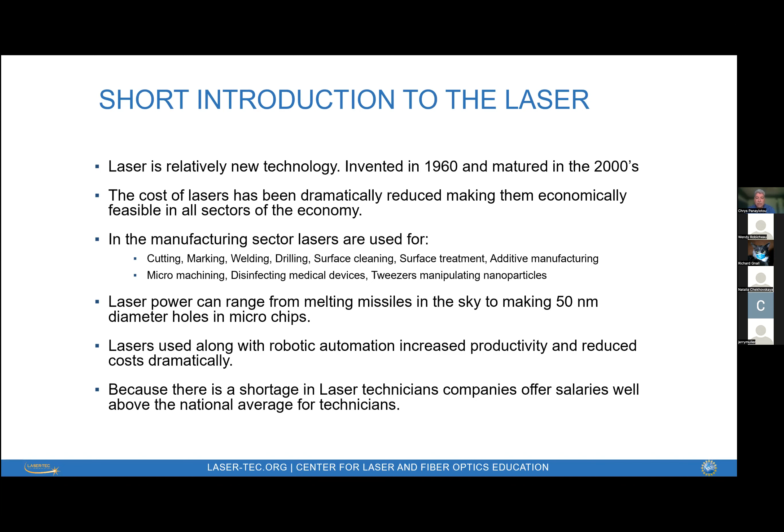So let's do a short introduction to lasers and why lasers are able to do what they do. What's really different in lasers than any older type of technology? Well, laser light is unique. It is man-made and has two key characteristics which make it different than all other types of man-made or natural light.

The first one is monochromaticity. A laser light has only one color. We also have lasers which have colors we don't see, so the better way to refer to lasers is by the wavelength of that radiation. Being monochromatic allows laser light to be selectively absorbed, transmitted, or reflected by different substances. So monochromaticity is one key parameter.

The second key parameter of the laser is coherency. It's coherent light, which enables you to have high energy density. Coherent light means that all of the rays emitted from the light source are all in unison. They all have the same phase and frequency, and they are emitted in the same direction, which creates this high energy density.

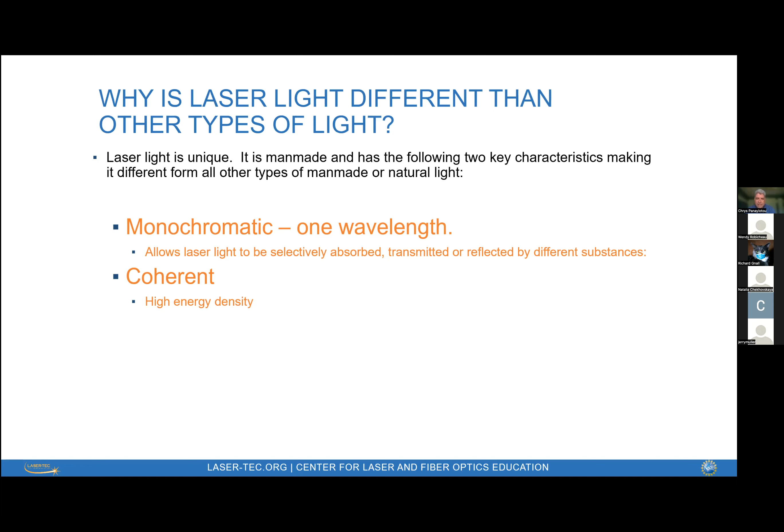So let's look at some examples of these two properties. Let's begin with monochromaticity. If you look at the picture on the right, this is a laser beam with a wavelength of 1064 nanometers, which is infrared light. It's not visible, and has the property of transmitting through human tissue without damaging it, and it's able to ablate and destroy a cancerous growth, which absorbs all of the energy, up to 10 centimeters deep below the skin surface.

Another application is a different type of laser at 415 nanometers, which is ultraviolet. Most UV light cannot easily be penetrated and absorbed through human tissue. But what it does is burn, or get absorbed by the top surface of the human skin, which makes it suitable for treating skin conditions such as acne, eczema, and psoriasis. So you can see in these two examples, two different wavelengths, two different colors of light, have two completely different effects.

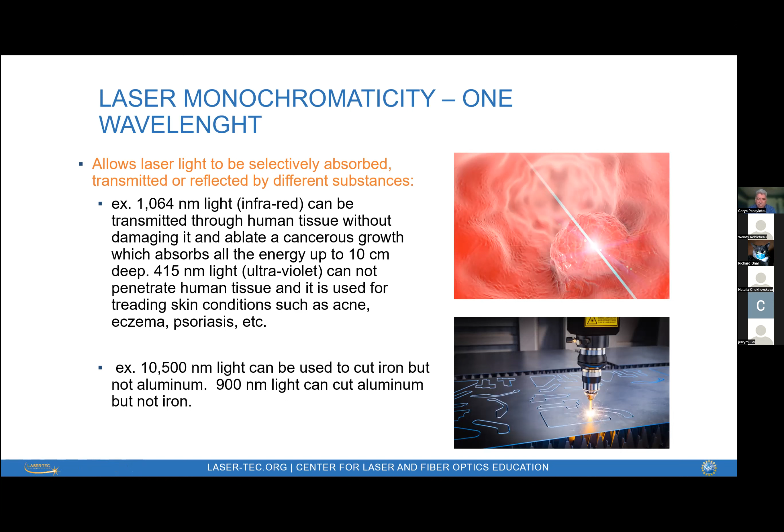Now let's talk a little bit about coherency, or the high density of lasers. The first example shows a 100-watt laser. If you think about a 100-watt light bulb, which is very common in our homes, this is a laser with about the same amount of power, 100 watts.

But with focusing optics, we can concentrate all of that energy onto a single spot. The energy density at that spot will be 100,000 watts in that little tiny geometry, which is sufficient to melt the metal. In this case, it's melting the outer skin of a drone and eventually bringing it down. The same application is used in this picture on the right, where the high intensity of the laser beam is used to make these holes or cut holes on a metal surface.

Now we humans using these lasers have to be careful, because that high intensity and high energy can be dangerous if we don't control it properly. Here's an example of a 1 milliwatt laser, which is a laser coming out of a laser pointer, for example. If it's focused properly into a 1,000th of a millimeter square spot, then the energy density at that spot will be equivalent to 1 watt. And 1 watt is enough to cause eye damage. Looking at this picture on the right, all of that energy would go through the lens of the human eye and will be focused on the retina, which will cause permanent eye damage. So we have to be careful and be aware of these issues with lasers.

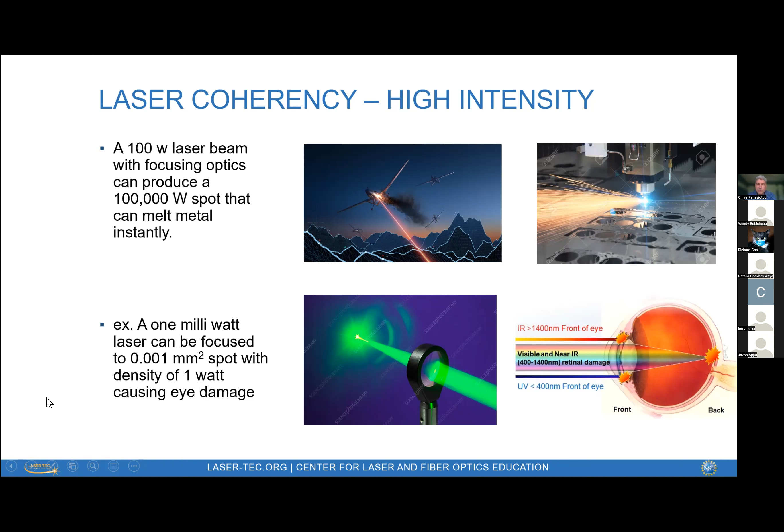The applications and the application market is huge. You can find lasers today everywhere. You can find them in medicine and healthcare. I will not read through all of these applications - you will have the slides later on if you wish, and you could go through them. You will find lasers in the consumer and entertainment industry, in defense and security, in scientific research, and of course manufacturing, which is the purpose of this webinar today. We will go through all of these different applications in manufacturing in the following slides.

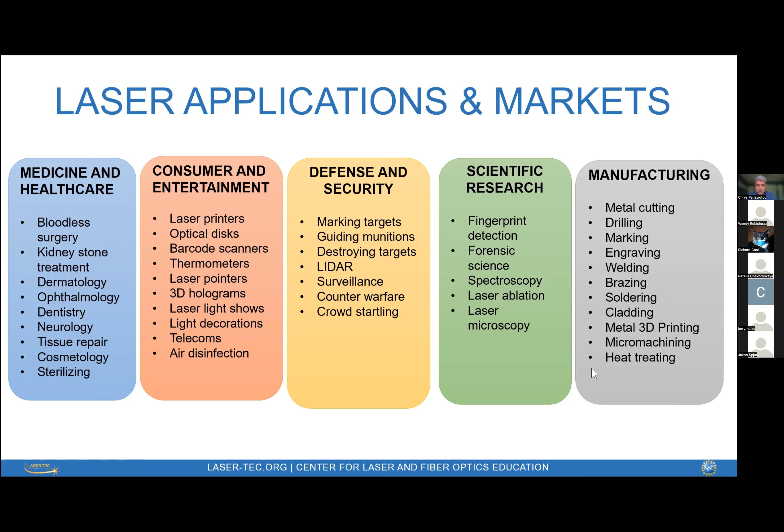So let's begin with metal cutting. As I said earlier, depending on the metal we want to cut, we choose the right laser with the right wavelength, which will allow the maximum absorption of the energy and cut the metal easily. So we can cut metals as thick as 1 inch with the appropriate type of laser. Here's another example of doing more delicate work by cutting a stent. This stent was cut with a laser, very, very fine work. You will see a video pretty shortly showing a stent cutting scenario.

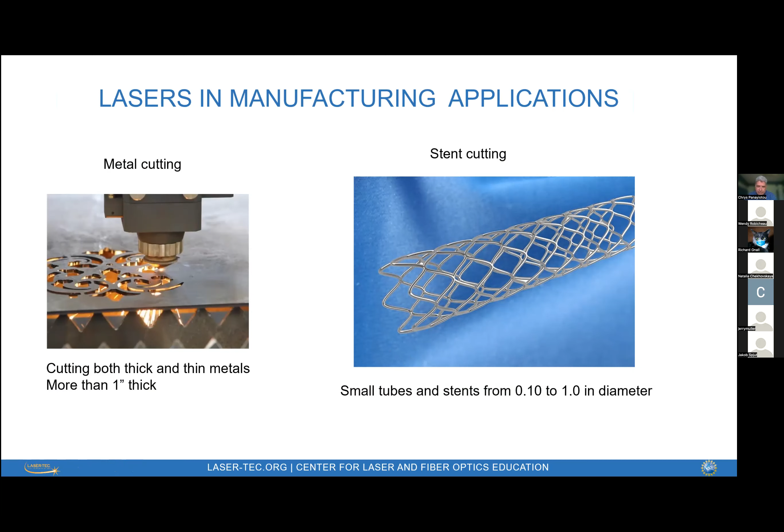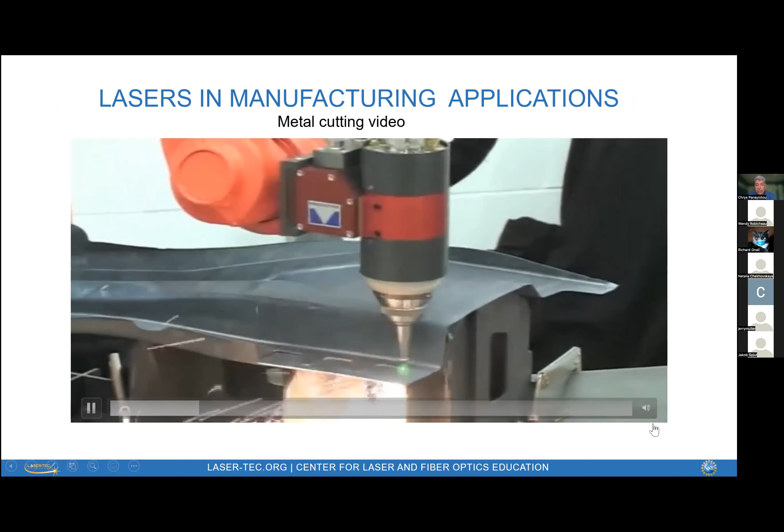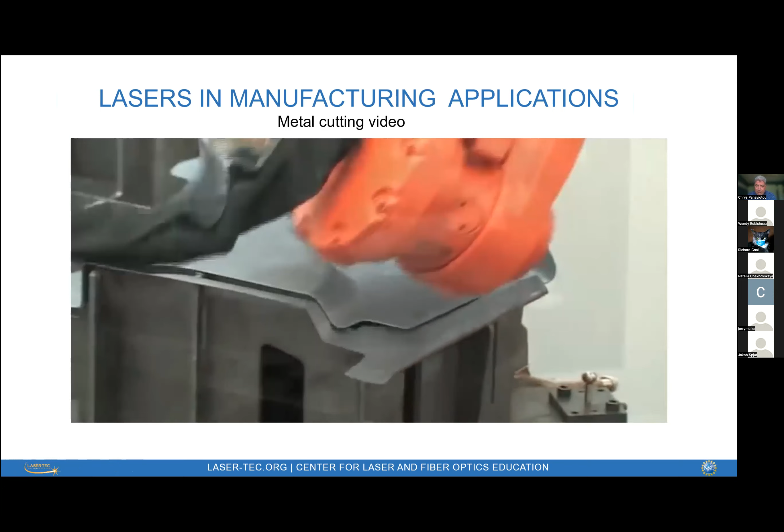But let's begin with the first video that shows cutting of metal. It's a metal piece, it's a part of a car. You can see how easily this laser cuts the metal. It's mounted on a robotic arm, and under the control of the robotic arm, you have especially this type of robot with 6 degrees of freedom. It can cut at any angle, rotate it, and do it so quickly and effortlessly that it's impossible for a human to do. So let's watch it. You can see how it bends and cuts at all angles, and the cut is nice and clean. After the piece is cut, the post-processing is basically minimal - you don't need to do anything else for that part to be used.

So here's another video, which is the stent. Of course, this is a close-up - these stents are much smaller in size. Let's watch the video with the laser up here on the top cutting. Notice most of these laser beams, if you don't see the beam coming out, are in the infrared region, above 700 nanometers, which we cannot see with the naked eye. We can only see the point where the laser melts the metal - you see the sparks flying and the light being diffused.

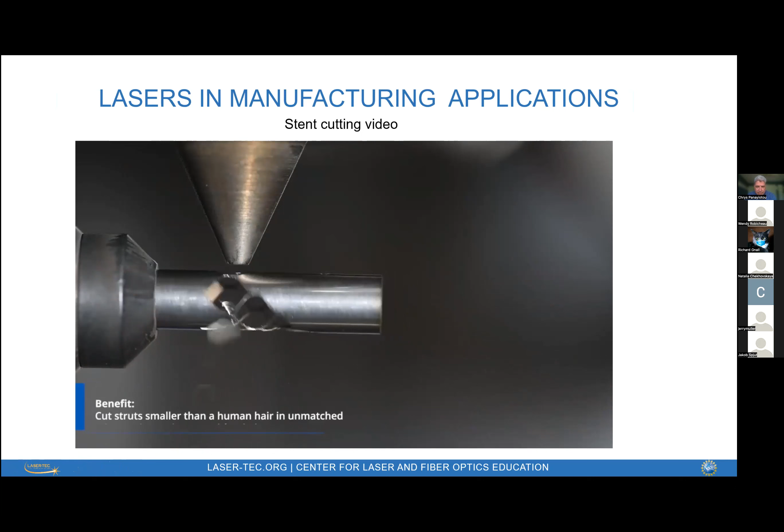So here is how it cuts nicely and cleanly the pieces of the tube. And at the end, you have a medical stent produced by this laser.

On this slide, you can see an application in drilling. It can drill metals, ceramics, and plastics. This is a big industrial drum, and all of these tiny holes you see have been drilled with a very powerful laser. To the contrary, on the right, we have these holes which have been drilled with a very different type of laser, because these holes are way, way smaller in geometry. As you can see down here, this is 100 micrometers, that's the length of this line, and these holes are about 50 micrometers in diameter. So different lasers for different applications.

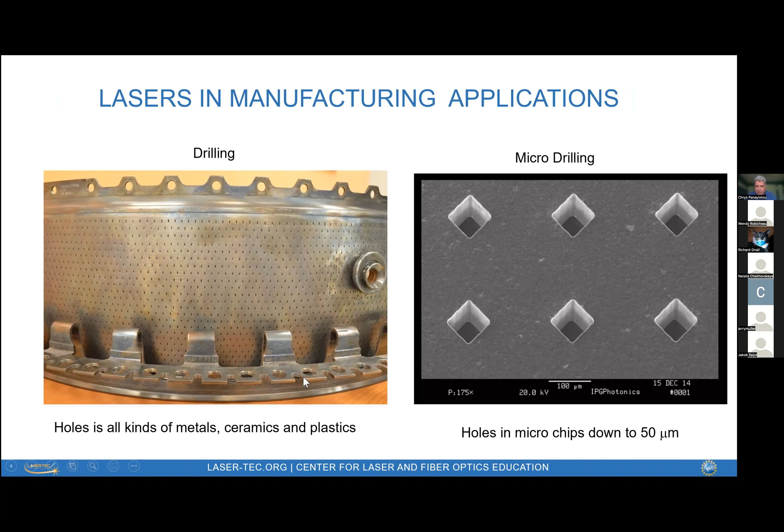This video will show metal drilling. So as it starts, pay attention to how the holes are cleanly cut, no debris left, and then everything falls on the bottom and is cleaned with vacuum. At the end, you have a final product which doesn't need much post-processing.

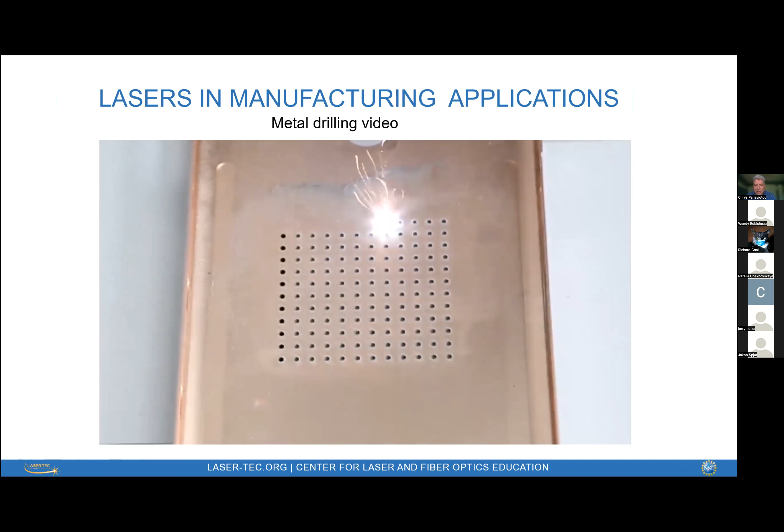Marking and engraving is another application of lasers. We can mark on metal, plastic, ceramic, leather, any kind of material. In those cases, you have to match the wavelength of the light with the absorption of the material on which you would like to mark. Everything is done under computer control, so you can have any kind of image - a barcode, or a more complicated image. Once you create it on the computer, you can have that image marked or engraved in any type of material using the right wavelength.

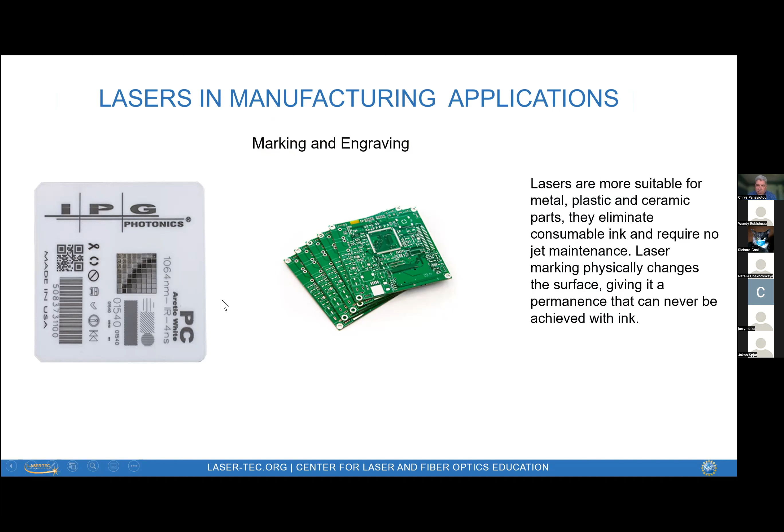Here's another example, a short video showing laser marking on metal. As it starts, pay attention again to how quickly the laser removes the top layer of this material, and under computer control, it marks the image provided by the computer. Very quick and very precise - we couldn't do these things years ago without lasers. The ability to mark and engrave in years before the laser was very, very limited.

Another application is welding and brazing. Here on the left, we have an automotive assembly line. Here is a car, and on the four corners, front and back, there are four robotic arms tooled with lasers at the end. Those four lasers together, under control of the same program, are able to weld, as you can see in the middle picture, where the red lines are - that's where the welds are being done by those four lasers. Typically, in this specific car, there were 3,000 welds done by these four lasers in a time frame of one minute. That's amazing.

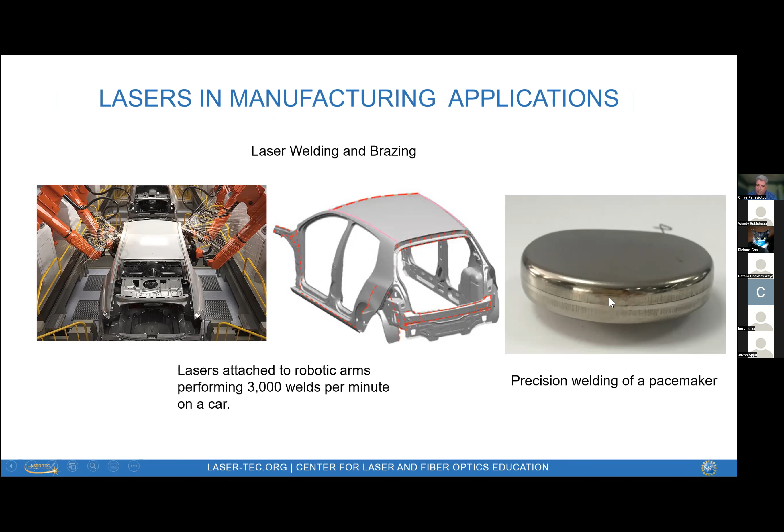Another application is the pacemaker you see here on the right, where you need precision and results without any flaw, because this will go into someone's body, and you don't want to go back and repair it or take it out to fix a problem that happened during manufacturing. So precision welding for pacemakers is another application.

We have a short video demonstrating the welding of those 3,000 spot welds in the automotive industry. Look here on this assembly line, you have several cars - in this specific line, they can handle up to 50 vehicles at a time. For each vehicle, there are four robotic arms with lasers attached, performing those welds simultaneously. Let's take a look at the video.

So again, all of these things are available and enabled by lasers and automation. A decade ago or earlier, all of these things were impossible.

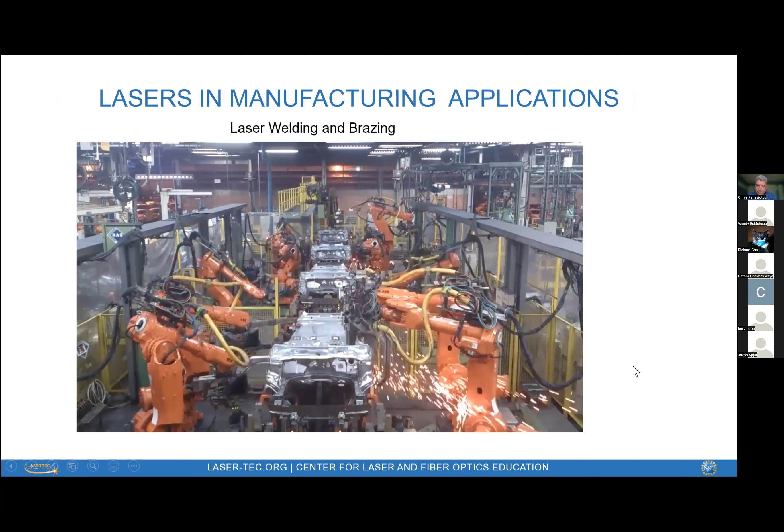Another application of lasers is in cladding. Cladding is basically metal deposition on another metal structure to make it harder, increasing its lifespan, or to repair damaged metal surfaces. Examples are in the mining industry and aerospace industry.

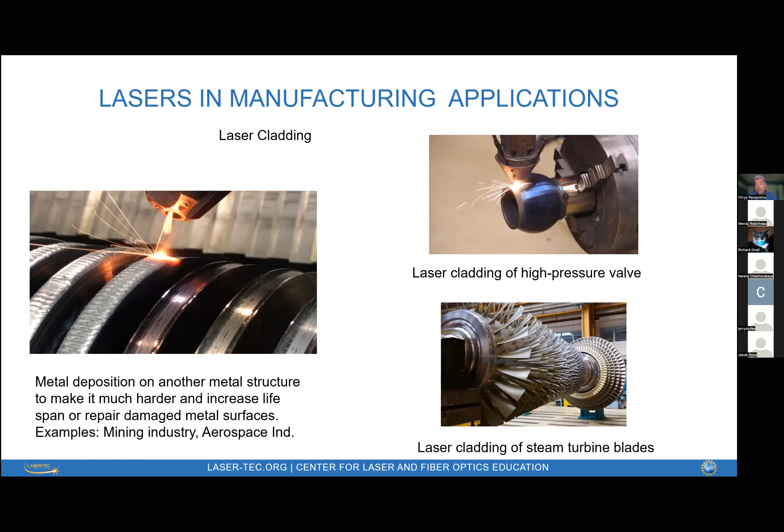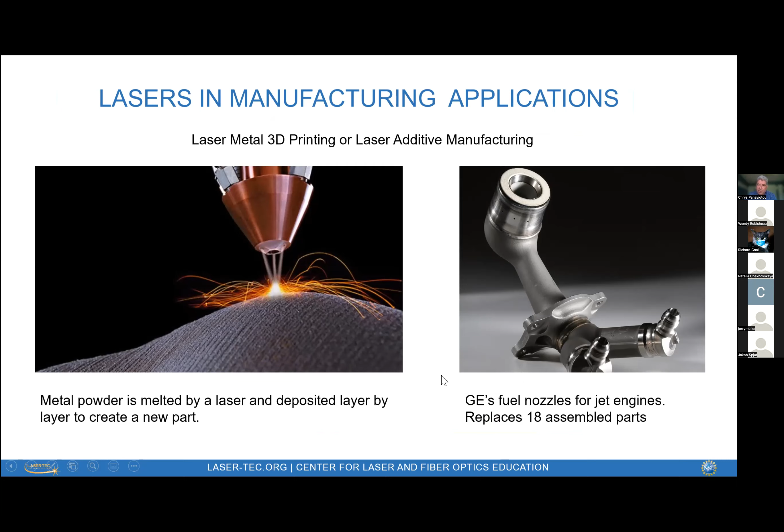Some pros and cons of laser additive manufacturing. The pros: they can make extremely complex parts. The parts are strong because they're made with new alloys available today. They're lightweight, and create little waste, as opposed to old subtractive manufacturing, which created a lot of waste. There's also high reliability and repeatability of parts, and on-demand production. All of these are pros.

Cons: slow building time. For example, that jet nozzle you saw took about 20 hours to make originally. To make it more time efficient, manufacturers make several of these at a time in one production run.

Another negative is the limited number of metal powders. These powders have a limited shelf time and are made of special alloys, formulated to easily melt with specific laser wavelengths. The finishing surface is also not smooth, so it needs post-processing. That's another negative.

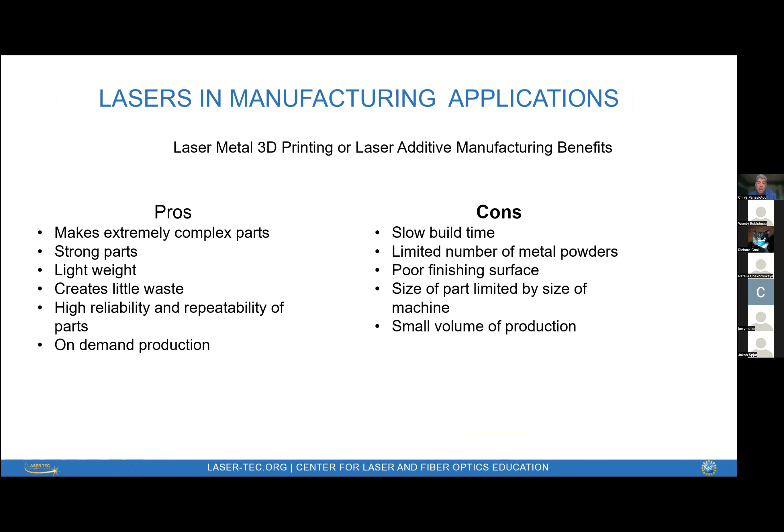Size of the part is limited by the size of the machine, so to make a huge part you need a huge machine, and these machines are expensive. One of the lower cost LAM machines costs about $500,000, and production volume is small. Because of these pros and cons, you have to select an application where the pros matter more to you.

This is used in places where you need metals that need extended lifetime, for example tools or some expensive household items. That's a very common use of laser hardening.

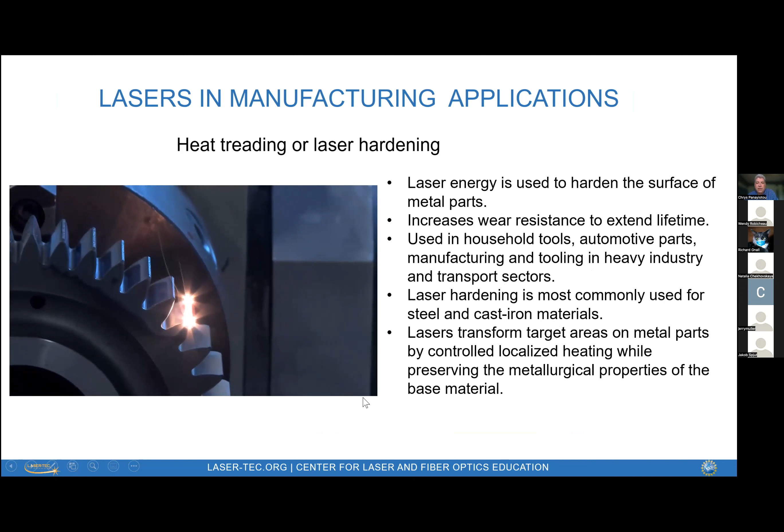Let's talk about jobs for technicians and the market outlook. We have about 420 openings on average for technicians every month. The average entry-level salary is about $65,000 a year, with $5,000 to $10,000 sign-on bonuses.

This is feedback we have from students finishing our programs and getting jobs. These jobs are available in all 50 states, with higher concentration in more industrial areas. To find out where these jobs are, which companies are hiring, and in which specific cities, go to our website where we have an archive of newsletters. On the left-hand side of the newsletter, you'll see all this information about available jobs, and you can go back as far as 2 years.

Other resources we have available for educators: we have 5 hybrid courses. You can do the theoretical part online, and the practical part with labs at our labs at Indian River State College in Fort Pierce, Florida. These include introduction to photonics, geometrical and physical optics, fundamentals of fibers and fiber optics, laser systems and applications, and introduction to spectroscopy, which is currently under development.